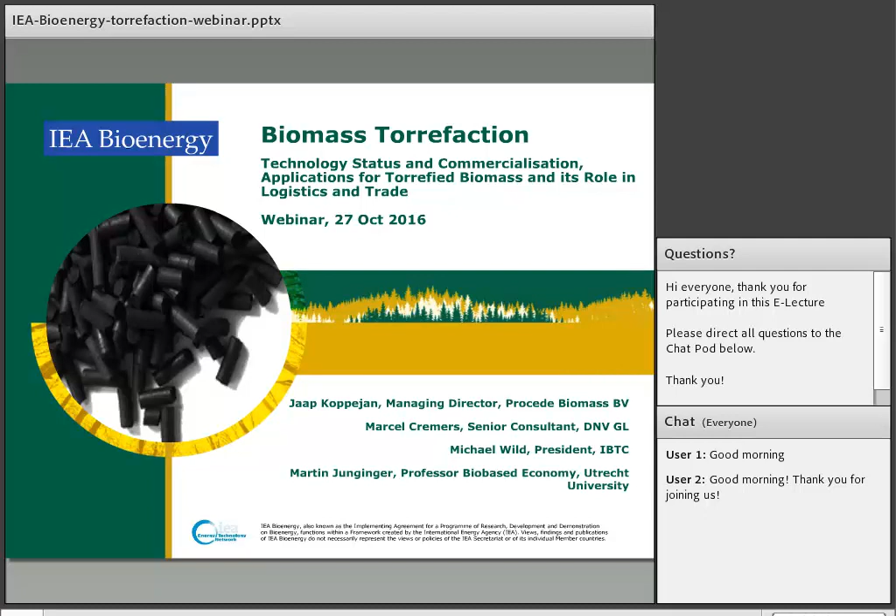For today, we would like to share some of the work that has been done on biomass torrefaction recently, done by people active in two projects that we initiated. One is a report published by Task 32 on the status of torrefaction technologies at the moment. The other is a report recently produced by Task 40 on biomass trading, showing the possible implications on international biomass trade. Both reports are available on the IEA Bioenergy website, so I'd like to invite you to download those reports for a more detailed look.

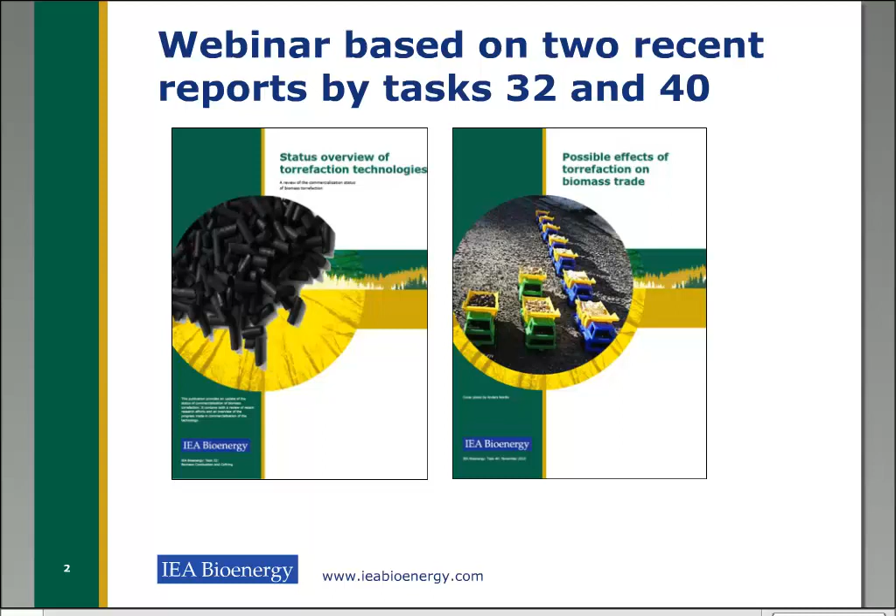For today there are four people involved in the presentations. First, it's myself, my name is Jaap Koppejan. I'm in my daily life also managing director of a contract research company involved in bioenergy, where we develop bioenergy technologies. I'm also a task leader of IEA Bioenergy.

The second person who will present today is Marcel Cremers. He is a senior consultant at DNV GL in the area of thermal power generation and has been involved in many technological reviews, feasibility studies, tendering procedures, etc. He has also been involved in Task 32 for a long time, and he is one of the lead authors of this report that we present today. He is also involved in many other activities in Task 32.

The third presenter today is Michael Wild of the International Biomass Torrefaction Council. He has been active in renewable energy for over 25 years, first in biomass-fired district heating systems in Austria, but also conversion of coal-fired boilers to biomass, for example. He has been involved in biomass trading for over 15 years, setting up supply chains from Asia and North America to Europe and to Japan, for example. He has also been involved in torrefaction technology for over 10 years, first with Andritz and now as president of the International Biomass Torrefaction Council. Michael is also active in Task 40.

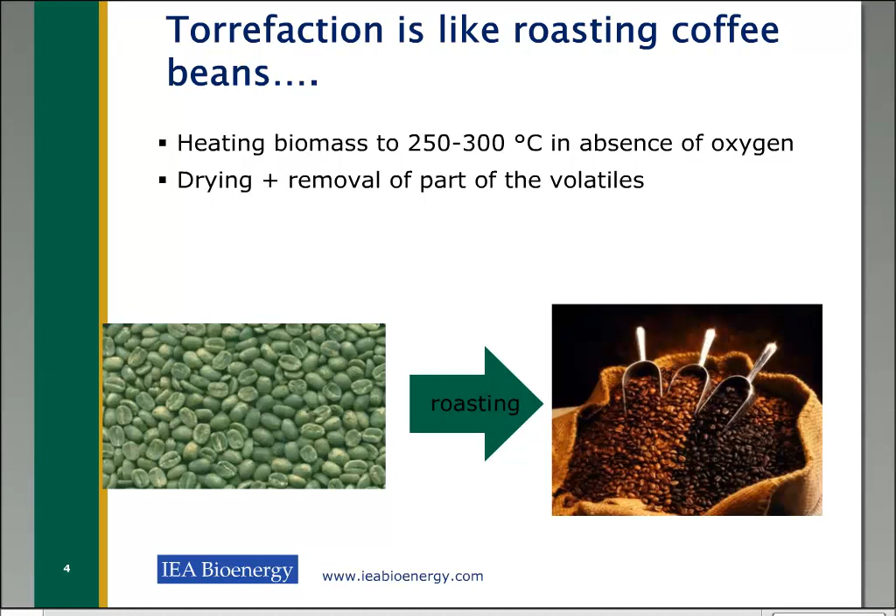As you see in the picture on the right-hand side, you can roast coffee beans to different degrees by changing the process conditions, and this is also what you can do with biomass. Depending on the temperature of torrefaction, you get darker or lighter biomass.

Moving on to the next slide. What are some claims made by companies involved in this torrefaction process who have tried to develop this process?

Claims made in the first place are that by doing this you can reduce the amount of volume contained in the biomass. So the volumetric energy density increases, and that could lead to cost reductions in logistics. Then by reducing logistical costs, it could be possible to transport biomass over longer distances, increasing the feedstock base geographically, or even use a wider variety of feedstock.

Then by roasting biomass, torrefying biomass, the biodegradation is reduced, so the biomass becomes more stable. You can use it in a larger variety of applications, not only biomass co-firing, but also some other processes, which Michael will talk about later.

Then in the back end, if you talk about a coal-fired power station, you have a fuel that is more compatible with coal, so it might reduce capex and opex costs in terms of grindability, for example, and water resistance. Then the combustion and gasification behavior becomes more compatible with coal.

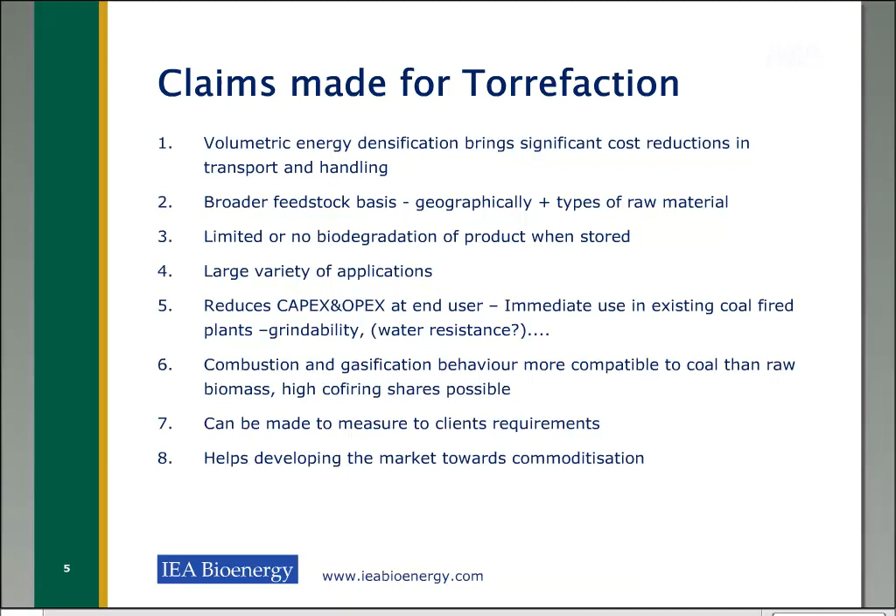So basically, if you sum up all these issues, we are producing a fuel by torrefying biomass that is more compatible with coal, so easier to feed into existing infrastructure. And by doing that, we can help the market towards more commoditization, making a standard fuel, and increasing the volumes of biomass that are traded internationally.

So how does this work? Looking at the energy balance, if you look at the amount of biomass that is converted into torrefied biomass, we see here just an example of a mass and energy balance, where black shows the heating value, red is the amount of energy, and blue is the amount of mass.

In the end, you see that by drying biomass, you lose some of the moisture and some of the volatiles, so the amount of mass reduces significantly. Then further torrefying it, the amount of mass is about one third of what we started with, while the amount of energy in the final product is almost the same, just slightly less than what we started with. So the heating value increases, and the amount of mass reduces significantly.

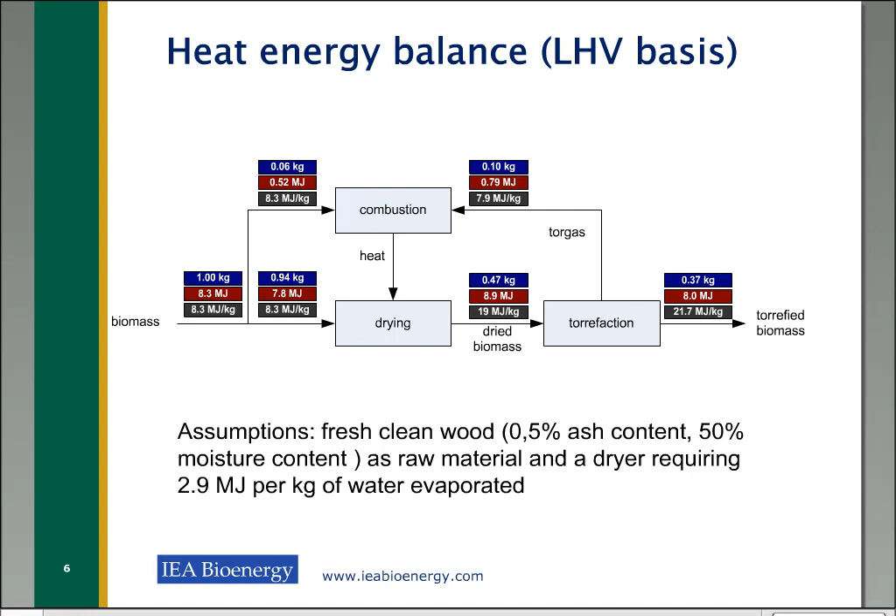So after torrefying, if you have a densification process, the volume of the biomass also reduces significantly, and we can have these volumetric... there's a graph in the first report that I mentioned that shows a little bit of the basic principles.

If you start with a dryer with an efficiency of 90%, or 80% I think we assumed here, you see some typical conditions where torrefaction could operate, say in this case 45% moisture content. The different lines here show different levels of dry mass loss. So if you reduce 30% of the dry mass during torrefaction and start with 45% moisture, then you could have an energy efficiency of over 90%.

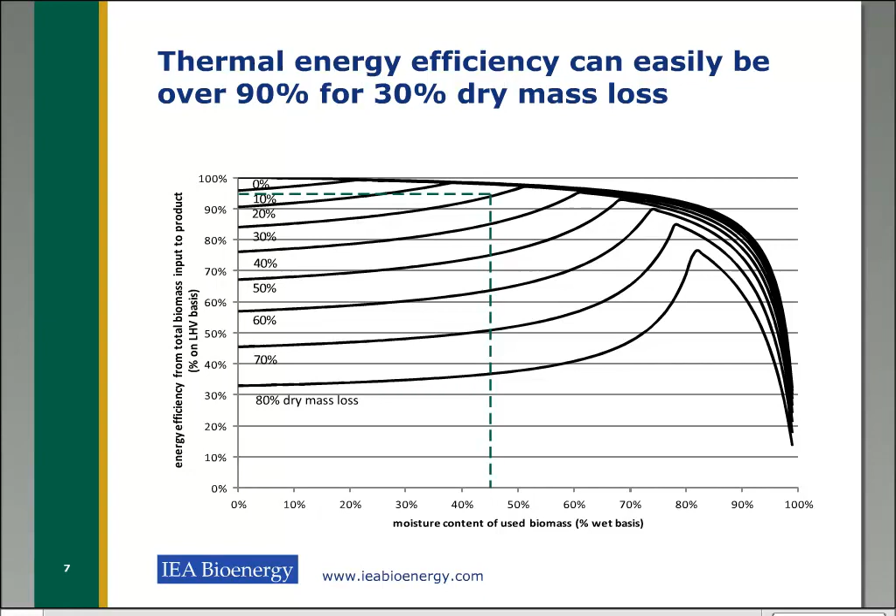This is typically what most processes operate at the moment. So this proves, or more or less illustrates, that torrefaction can be energy efficient.

Some technical challenges remaining where various developers have struggled include the water resistance of the product and pelletization of torrefied biomass, which is sometimes difficult to achieve. I think we have made quite some progress recently in this area, but still this was one of the points of attention.

Several process owners were unable to meet constant quality requirements and struggled with their process control, for example. Another issue was that dust formation of torrefied wood pellets could be significant and also create a health and safety issue. Then finally, the ash content, of course, increases if you torrefy biomass, because the amount of mass reduces significantly, but the ash still remains in the product.

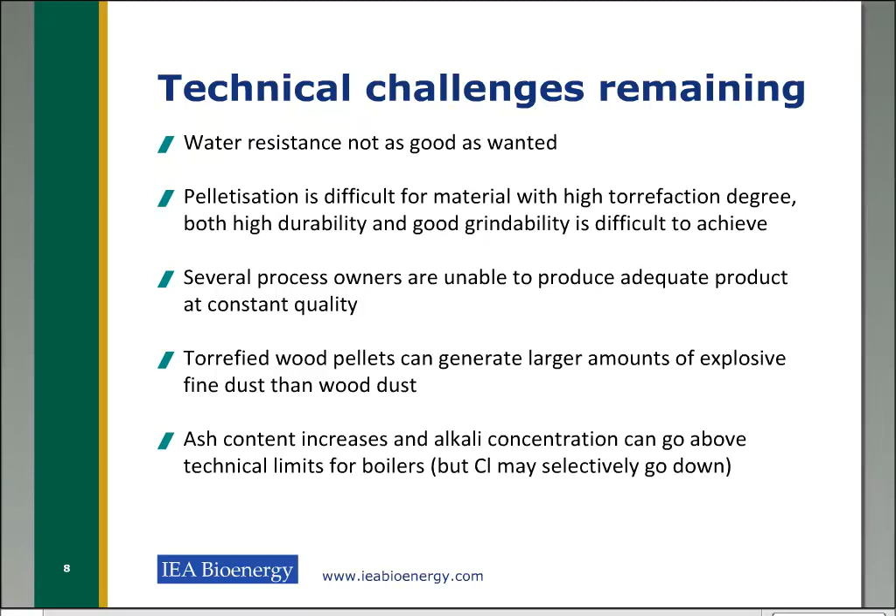On the other hand, we see that the chloride could, in some cases, be removed during torrefaction, which is quite an advantage for combustion processes.

And the reason for this is the fact that we have more volatiles in the torrefied wood. So basically, there are some issues also during conversion of the fuel, but looking at the impacts, our conclusion is that these are all manageable.

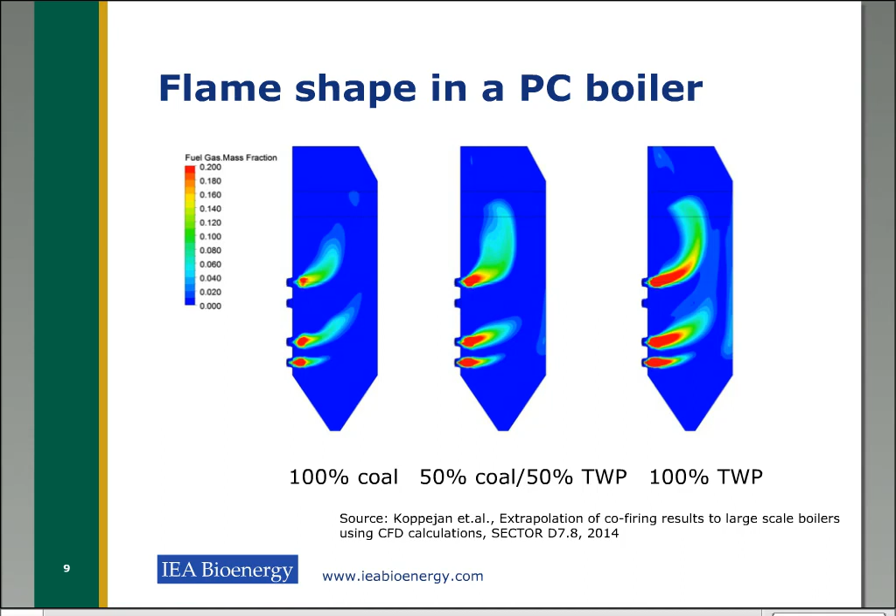Thank you all for listening. This is the section I will be presenting, about commercialization of the torrefaction technology.

It is mostly based on the work we did in 2014 and early 2015 on the status of biomass torrefaction within Task 32, which can also be found in the report.

The first thing we looked at is we wanted to have an overview of the current status of the torrefaction technology as such. We did an inventory among many different torrefaction developers about the current status, the capacity, and so on.

We performed an extensive round of interviews with many developers in the market. From the consultations, we derived that over the years, the total installed capacity has increased to somewhere around 150 kilotons per year.

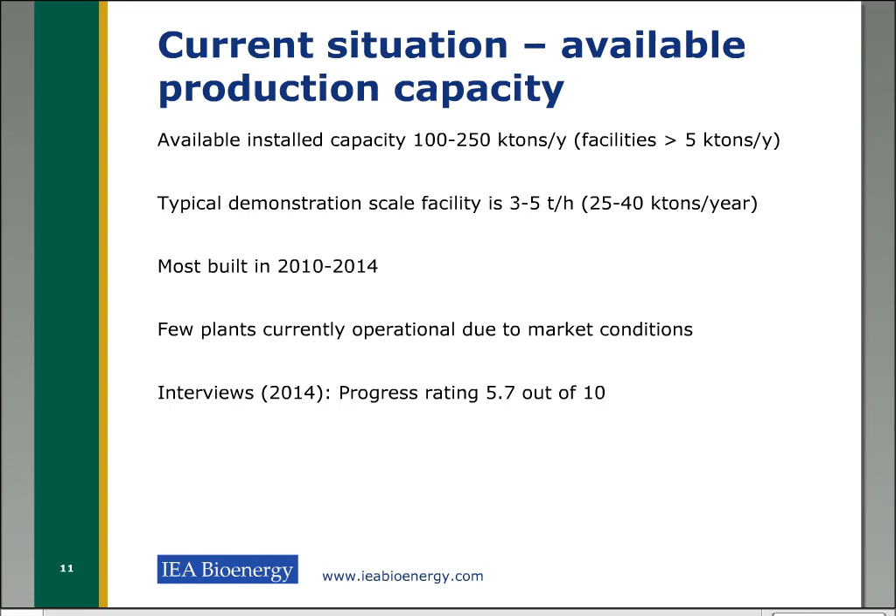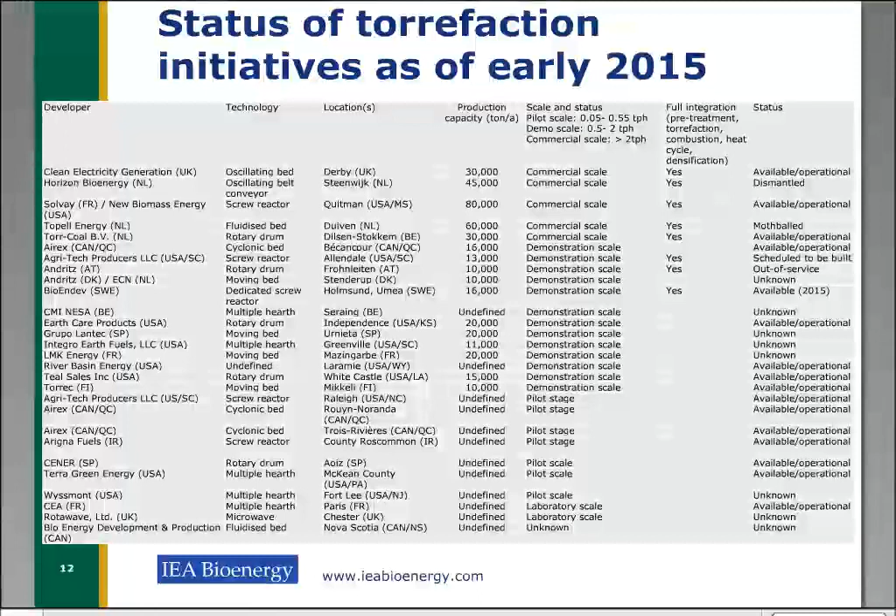For completeness, this is an overview of different torrefaction initiatives that were present in 2015. It is not completely accurate anymore, but essentially I think the overview is still valid.

What can be learned from this is that if you look at the scales, there is a variety available, from lab scale and pilot scale to demonstration scale. The largest facilities are somewhere between 30 and 80,000 tons. Locations are mainly in Europe, the United States, and Canada.

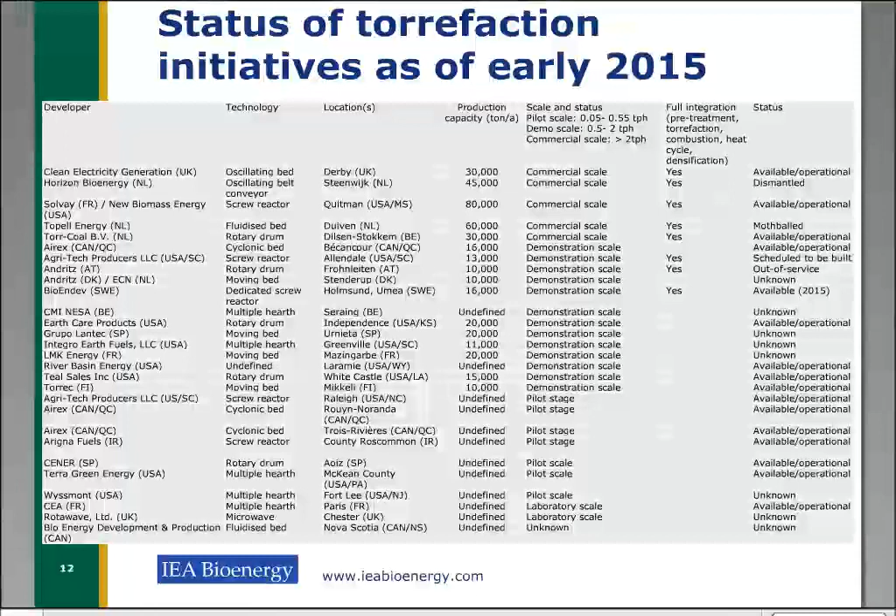And if you look at the status, from these demonstration scale facilities, many are currently idle, and some of those could be made available when needed.

We also looked at research, just a global overview of the tendency in the topic of torrefaction. We looked in the Scopus database and provided the keyword torrefaction, included in the title or in the abstract.

Just last year already, about 175 publications have been traced in Scopus on torrefaction, and about 90% of these publications are actually scientific articles.

So it means that a lot of information and a lot of knowledge is currently available on torrefaction, both on the process as well as on the product. And this gives a lot of room for further development of the technology.

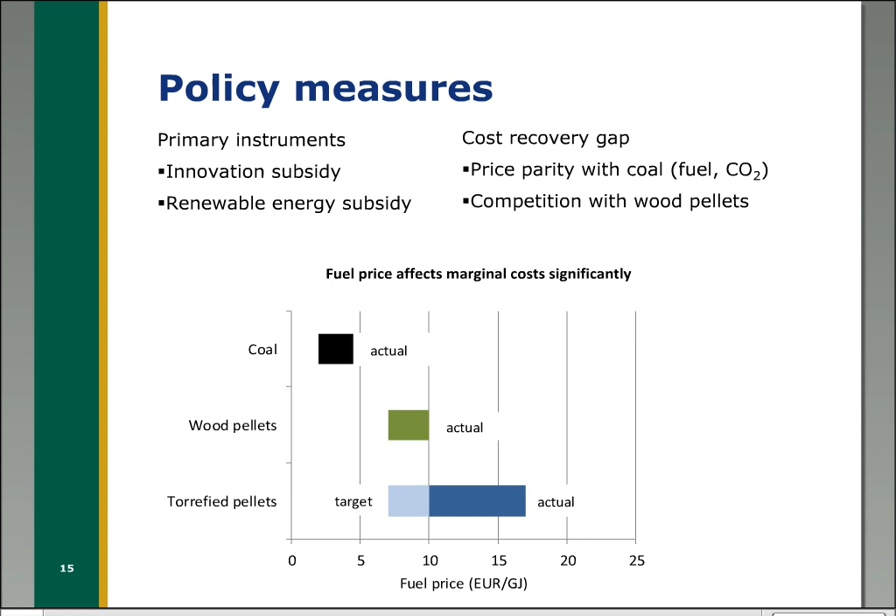Now, a second restriction is on the trade, and Michael will go more deeply into it. That is the development of standards is important.

The first thing that needs to be considered is what kind of product are we trading. So for that, a quality standard is needed. A technical specification of thermally treated wood is currently under development, but the final intent is to have a full technical standard. Then there are specific requirements for production and handling of the torrefied pellet.

That can be in the form of an MSDS, which has been developed under the SECTOR project. And then there are certain regulations in parts of the world that are needed, for example, for importing torrefied pellets. Michael will also tell a little bit about that.

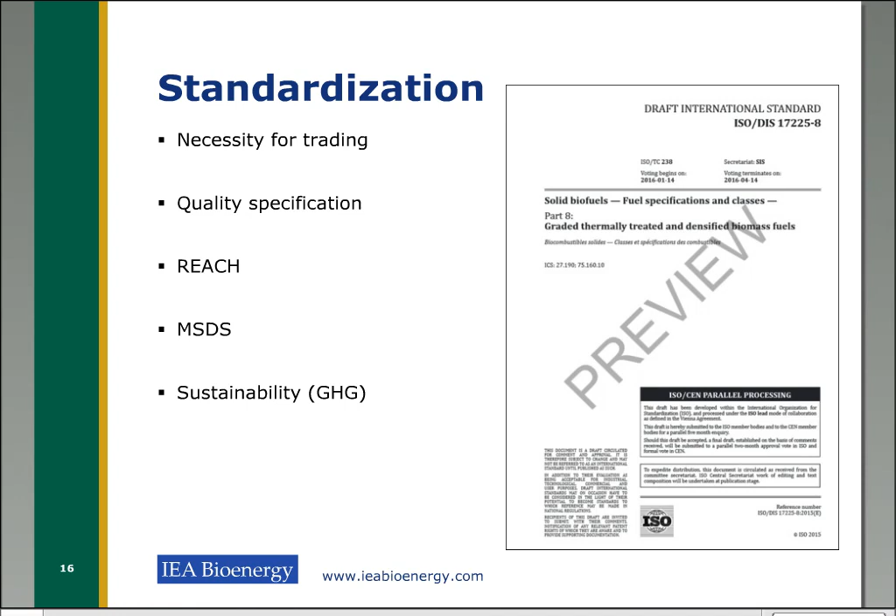And finally, we need to ensure that all the biomass we use is sustainable. So sustainability certification is definitely important as well.

Then the third restriction that was mentioned is that there is a negative perception by the end user of the product. So in the early 2000s, there was a very good introduction of the technology and the product, mainly done by ECN and some others, with very promising results about the product quality and how it can be used.

So that gave a boost to the technology, and in the period of 2008-2012 there were a lot of new initiatives. We saw various demonstration scale facilities with quite significant claims, but at the same time we also faced a financial crisis for which it became more difficult to obtain finance for new projects, and focus has been on torrefaction, and as Jaap also said, process control was sometimes a little bit difficult.

So this made the perception by the end users on availability and on the product itself lack a bit, and that was mainly in the years 2012-2015. It was difficult to gain offtake contracts for the torrefied biomass, and the wood pellet market further developed.

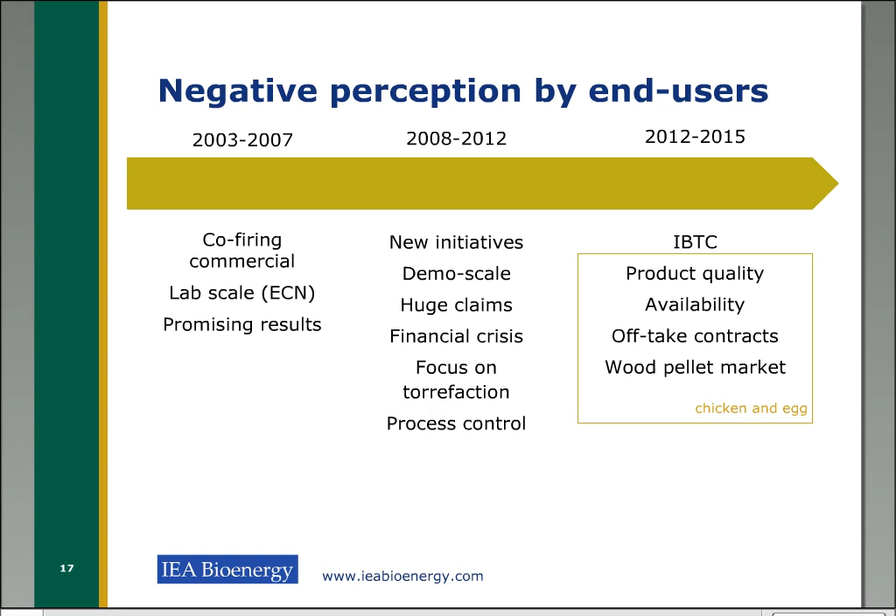So the main chicken and egg problem we faced actually is that there was not enough product available at a quality that was more or less claimed, and at the same time there was also not enough request from the market, so to say, in order to scale this up.

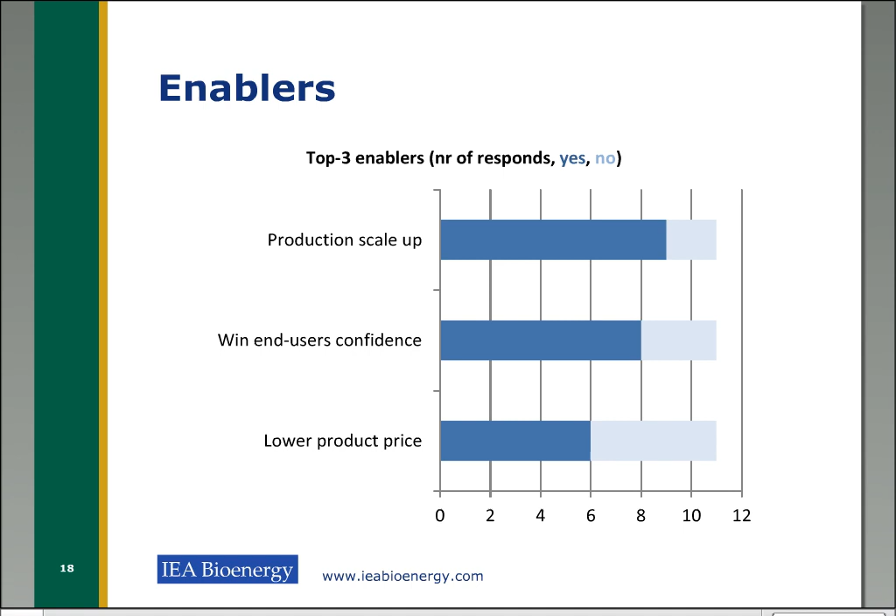So then we also asked what are the main enablers in order to further scale up production. That will help then to win the end user's confidence and also result in a lower product price.

A little bit, if you do some simple calculations like we did here, you can look at the demand and the production side. If you look at the demand side, for a 600 megawatt coal plant with 10% co-firing and about 6,000 full load operating hours, you would require about 150,000 tons per year of torrefied pellets.

If you look at what is currently available, most demonstration scale facilities have, at full-time utilization, a capacity of 25 to 40,000 tons per year, and most of them are currently only partly utilized. So the global production capacity is about the same size as needed for one plant with 10% co-firing. The production needs to be scaled up. If you look at wood pellets, typical facilities are somewhere between 50,000 and 200,000 tons. So scale is really needed.

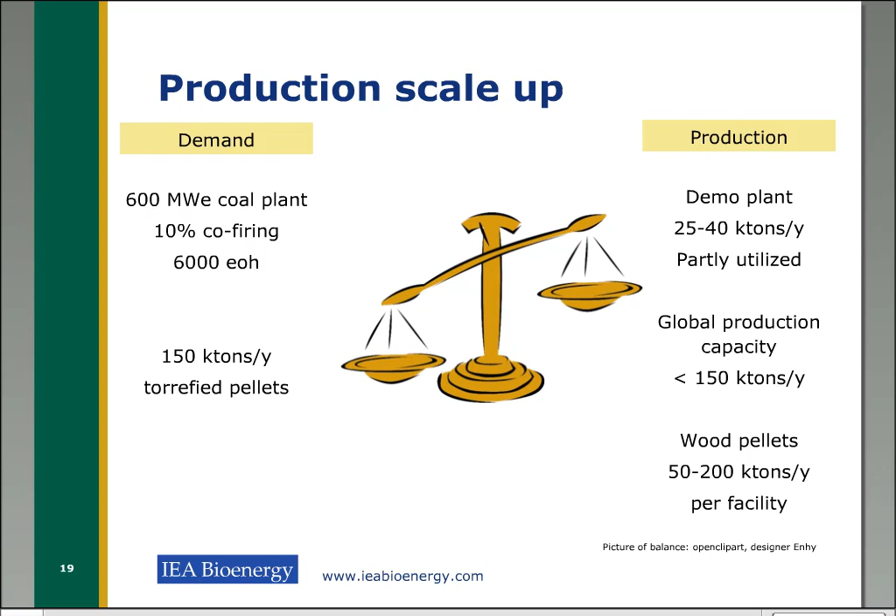Ways to win the end user's confidence include, for example, finding new markets. Michael will go deeper into this, and developing the whole chain in advance, which is important for technologies that are still in the development phase. Make realistic promises. Ensure the quality of the product. Ensure that the product is also safe to use.

Make a tradable product and have the proper standards in place. And then the last question is, in case you have a product with price specifications that's ready to use, how do you bring the price down?

If you look at our report from 2012, it shows the commercial target price for torrefied pellets compared to wood pellets. We also asked some utilities: if torrefied pellets were available on a large scale, the product quality was as expected, and the fuel price in the harbor was similar to that of wood pellets, would you consider using it? The general answer was yes, we would definitely consider it.

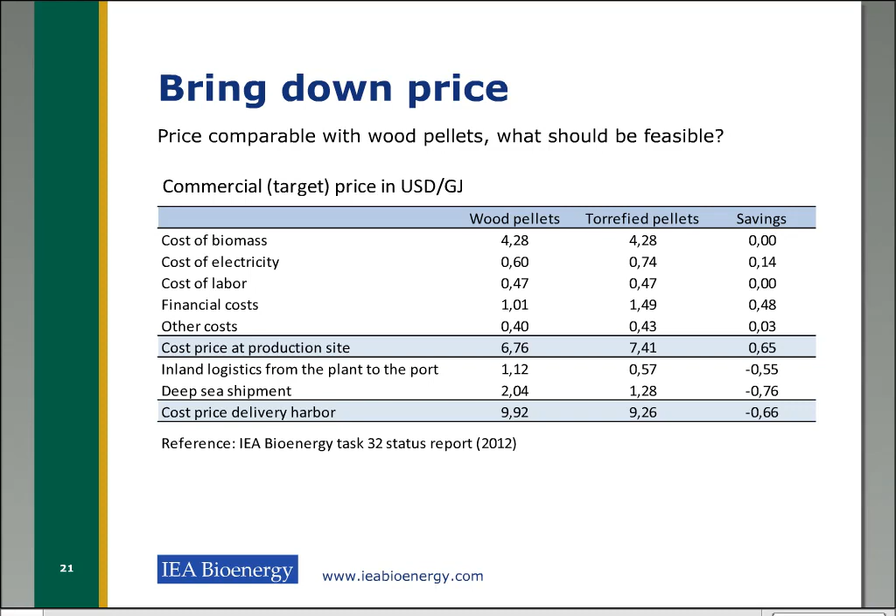So then the question is whether it's also possible to have a cost price in the harbor that is comparable to that of wood pellets. From the calculations, in which a torrefaction developer was also involved in 2012, it shows that torrefied pellets in the harbor could be in the same range as wood pellets.

To conclude, we have a process that is well developed, with a lot of research and developers who have gained a lot of experience. We know what the product looks like, but now we have to find specific markets, for example in energy or the steel industry, or maybe further ahead as part of a bioeconomy, where you use torrefied biomass, mill it, gasify it, and use the syngas for further utilization in the bioeconomy. That could be the potential of some markets.

At the current stage you would need to develop the whole chain, and in order to bring the price down, alternative feedstock types would be a way to go. One interesting example in this context is a project currently being developed by a number of companies in Indonesia. There's a reference here to a YouTube movie, so please have a look.

Finally, with that, I would like to hand over to Michael, who will tell you more about the tradability of the product, going into the details of the supply chain, the overall requirements for logistics and trading, as well as new market applications. So, Michael, the floor is yours. Thank you, Marcel, and thank you for this good presentation about the status of technologies and how some of the actors in R&D in the sector see the situation here.

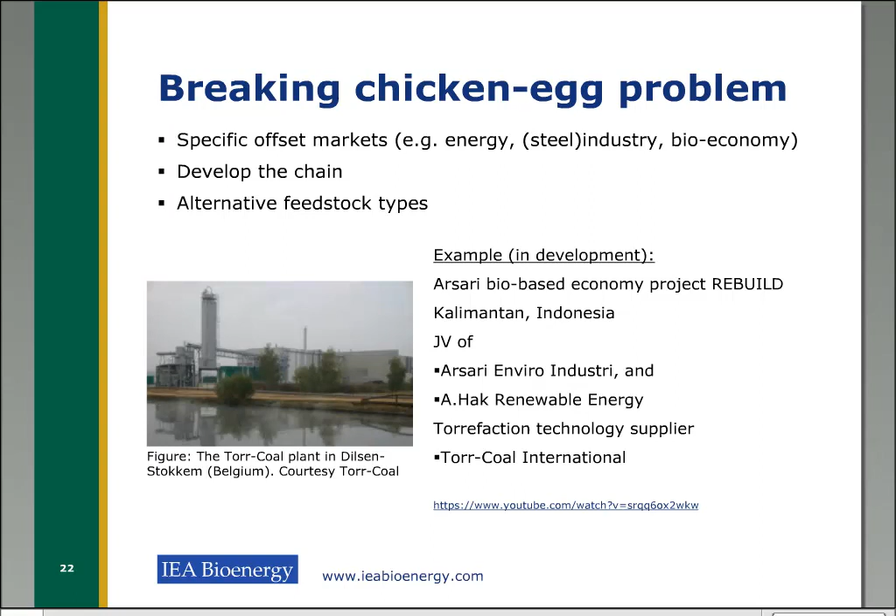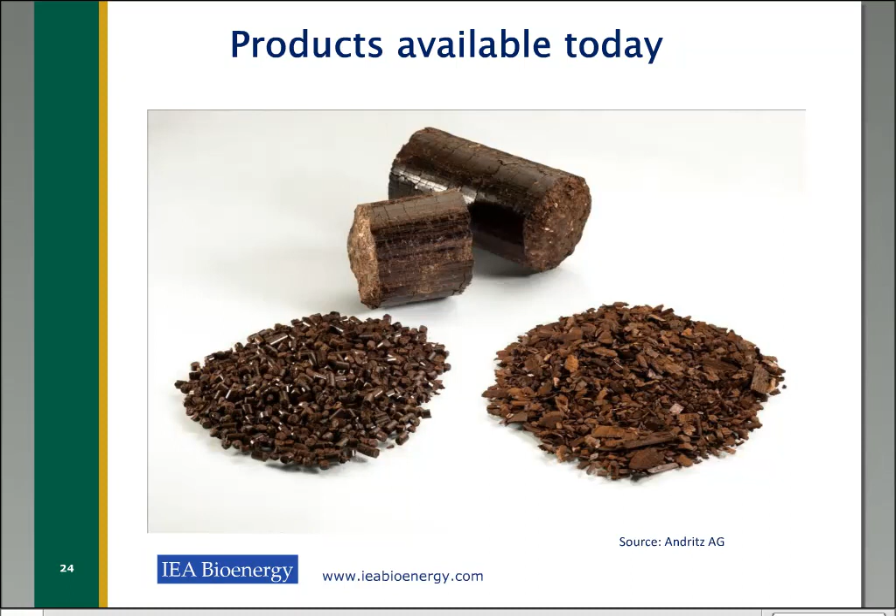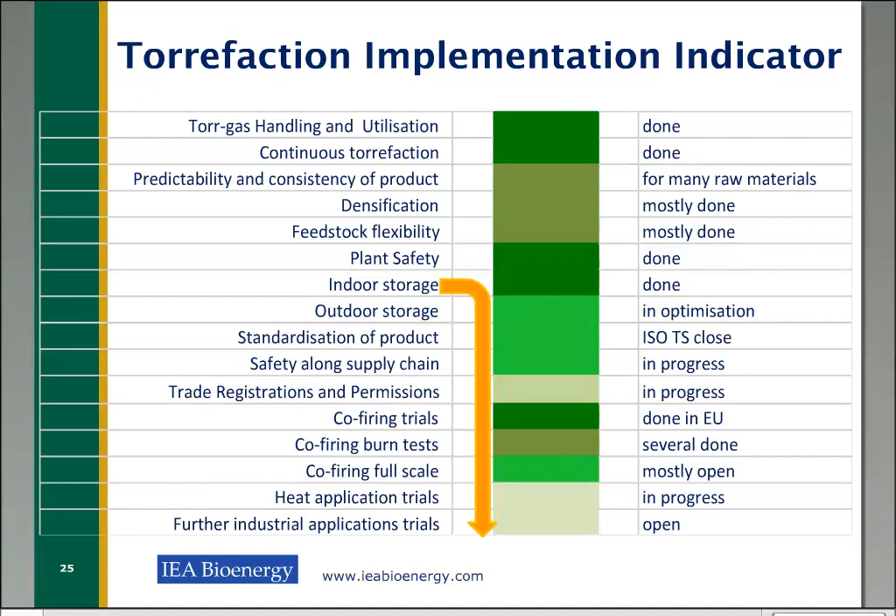When asking for trade, we have to first see what would be the conditions for trade, what is needed for trading. First of all, we saw already in Marcel's presentation that there is the prediction that the logistical costs for torrefied biomass will be significantly less. We usually say between 20 and 40%.

Now, how can we prove this? This will be part of my presentation, to show that torrefied biomass can be used or transported along existing logistical infrastructure. No special requirements will be needed. That was in our report one of the findings from different analyses we undertook.

We also have been looking at the status of standardization. Marcel referred to this briefly. I will introduce you to what the situation is and what we are expecting. And a precondition for trade is not only production and possibility of using logistical means, but there also needs to be demand, because this is usually the driver for the whole overall value chain.

So it is well known and discussed from the very beginning of torrefaction initiatives that torrefied biomass is a good substitute for coal in coal power plants, or for co-firing with coal. But is there more? Are there other markets, other sectors in the industry which might be interested in using this fuel? This was also part of what we analyzed in our Task 40 report, and I'll introduce you to the results here.

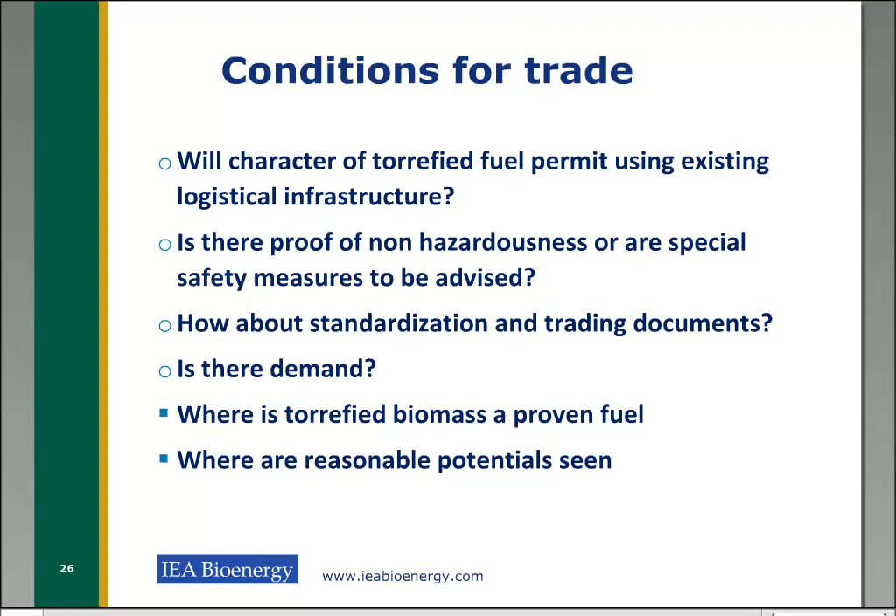I start with one of the preconditions for a very efficient transport: the water resistance. We know that wood pellets, once getting only close to water, start to disintegrate, meaning that to build a supply chain for this biomass to the consumers, there needs to be a new infrastructure, or an infrastructure which prevents 100% that water comes in touch with the wood pellets. This adds cost to the final product, and the torrefied product always claimed, because of hydrophobicity, that the densified materials will stay intact when in touch with water.

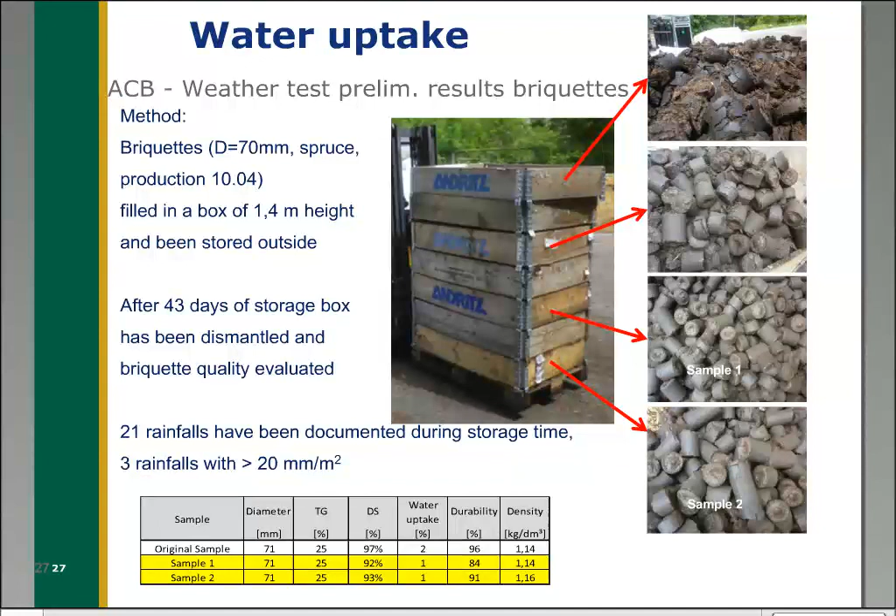A lot of water uptake tests have been undertaken. Unfortunately, there is no standard for water uptake, no definition of what it really means, what water uptake is. So most of the producers in the IBTC have developed their own water test, some research institutions as well. I present here the results gained by ANDRITZ, but similar results have also been shown by ECN.

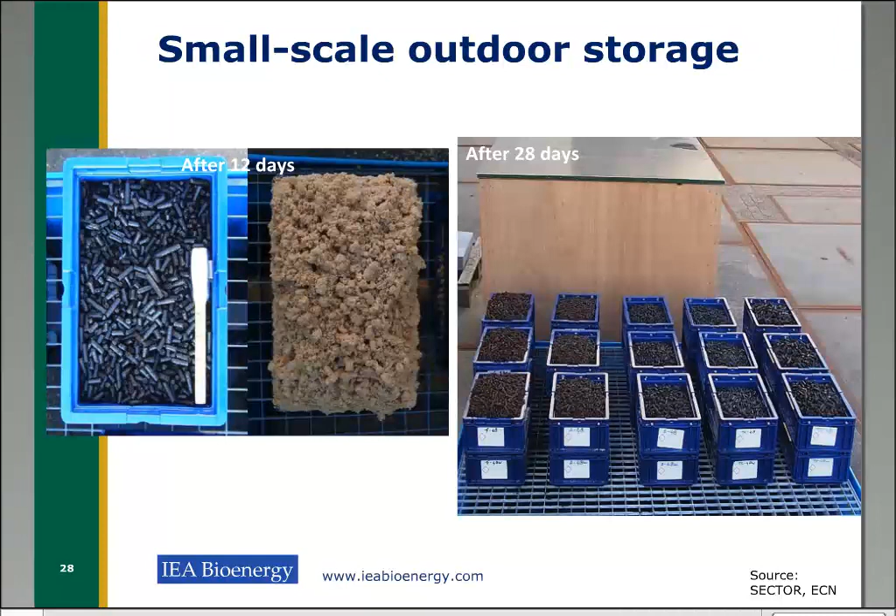Basically, the result was: short-term contact with water has absolutely no effect on the torrefied biomass once densified. Long-term contact will, on the heap, cause the top layers to get weaker, meaning they lose their durability. They will never disintegrate as much as the wood pellets in this picture are doing, but they will become a little bit weaker, so the durability will be reduced. But this is only for the top layer in the heap. If you go to the core of a heap, still the old characteristics will be found.

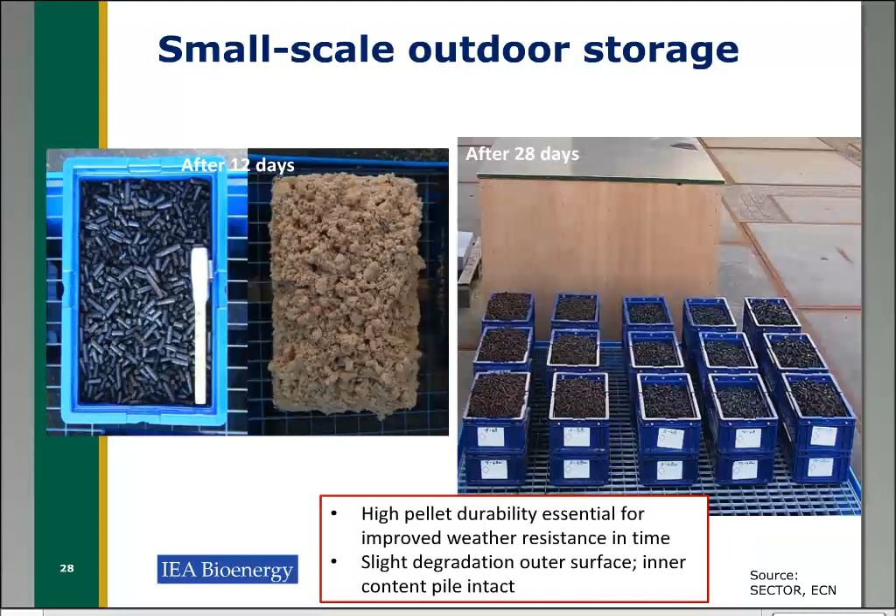Meaning that if on a typical coal yard, torrefied biomass is stored for 1 to 2 or 3 weeks outside, this will have literally almost no effect on the further handling of the torrefied biomass in the feed-in system in the coal power plant or in the industry. If you would like to store torrefied biomass for 2 years outside in rain and frosty conditions, then you have to accept that the durability of the product will suffer, and the product will be sufficiently, substantially weaker. Another reason for fear while transporting biomass is biological degradation.

Biological degradation has two effects. First of all, you have a mass loss, so you start shipping or storing a certain quantity, and in the end of your process you have simply lost some mass, some weight, and some value through the biological degradation. On the other hand, biological degradation also means that a lot of carbon monoxide, a poisonous gas, is produced, which, for instance, in the logistical chains of wood chips or wood pellets has already caused quite some bad accidents.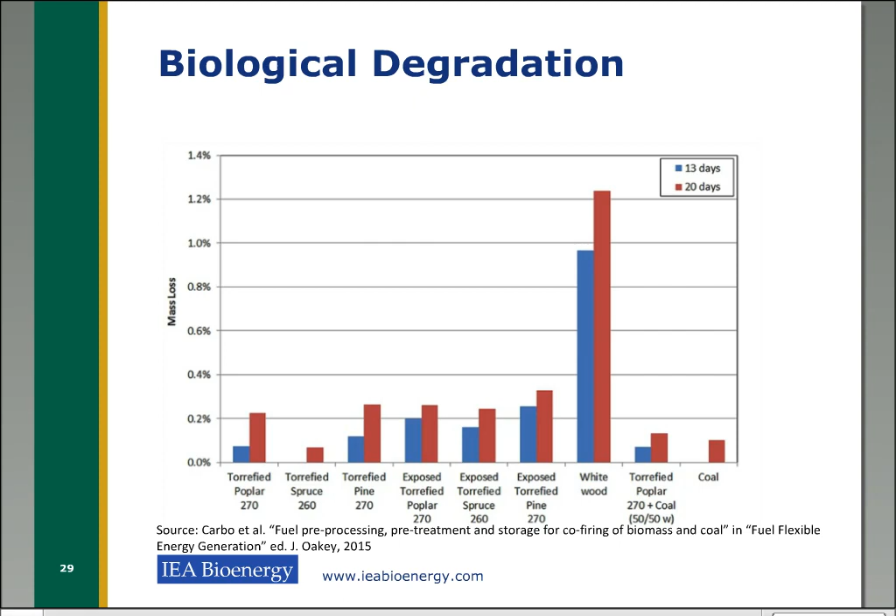Here with this diagram, we found proof that torrefied biomass has a much lower biological activity and biological degradation than fresh biomass, be it wood chips or white wood pellets. We see a factor of 2, eventually 3, lower biological degradation than with white wood, and this difference stays almost constant over time. So unless a very strong heat source is applied to torrefied pellets, you can estimate there is almost no ignorable biological degradation and carbon monoxide resulting from this in storage.

Furthermore, transportation and storage handling always require that you know precisely whether your product is highly explosive, and what dangers you are exposed to. Minimum ignition energy is one of the means to prove how easily a material explodes. Now we all know that pulverized raw biomass, pulverized wood, is very highly explosive.

Torrefied biomass does not change this situation, and pulverized torrefied biomass has almost the same or a little bit lower ignition energy values than raw biomass. With this diagram, we found proof that the explosivity of the dust is not really a result of being torrefied or not, but rather a result of what the raw material has been, where the pellets or torrefied pellets have been made from.

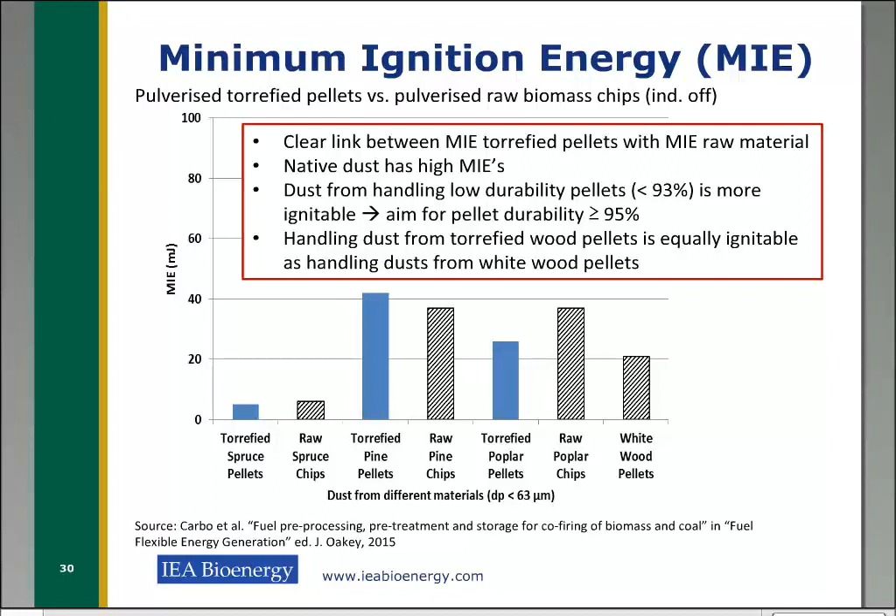Nevertheless, torrefied biomass is much more brittle than non-torrefied biomass, meaning the appearance of very fine dust is more likely in torrefied value chains. This sets the requirement for higher and more constant durability in traded products, giving eventually a slight advantage to briquettes in international trade, simply because the surface-to-volume ratio is better with briquettes, and fine dust will always only appear on the surface.

Storing torrefied biomass outside means it is exposed to water, so there is some runoff water. Is this runoff water toxic? Is it ecotoxic? From research results in Austria undertaken with Andritz and Austrian research institutes, we found that once tested according to the DIN standard, the runoff and leaching waters of heaps of torrefied biomass stored outside show no proven ecotoxicity we have to be afraid of.

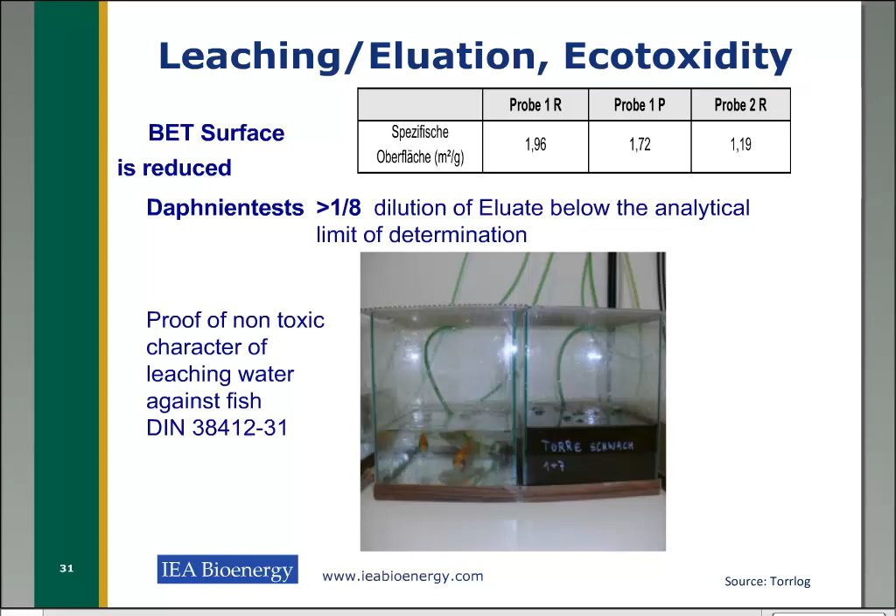By this, we see that to date there is nothing special requiring additional requirements for torrefied biomass compared to any other solid biomass traded.

Now, coming to standardization. It was very clear from the beginning that standardization is one of the key elements to make this successful, simply because at the beginning of the torrefaction market there were so many confusing expressions, from torrefied pellets to biocoal, black coal, biochar, black pellets, and so many different trade names developed.

So to make it clear for customers what product they are being offered, we initiated from the very beginning of the IPTC the introduction of a quality standard. And because the ISO 17225 solid biofuel standardization process had already started, we embarked on this.

Task 40 could report that the process was well underway, and now, even after the Task 40 report, we can report that the committee has decided on technical specifications as a first step in the standardization process, with a full standard expected in 3 to 4 years after some experience in logistics and with final customers is gained. These technical specifications are expected to be released in Q4 2016, maybe Q1 2017.

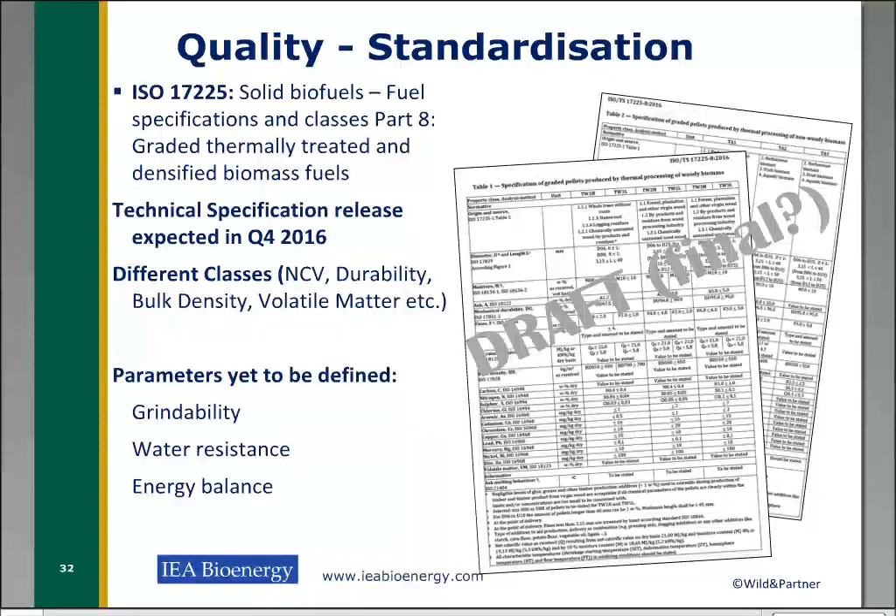In parallel, there will be a second group of defined products, which is quite important to me, because here the ISO committee took reference to the initiative of the torrefaction industry, not only to torrefy wood, but also agro byproducts or dedicated agricultural feedstock. This addresses one of the core issues of cost competitiveness of wood or biomass with coal. Wood is simply an expensive product, while several byproducts of the agro-industry and eventually grass plantations would produce much cheaper biomass, enabling a much cheaper product to be supplied to the industry.

We see that torrefaction is really a door opener in this direction because of the reduction of chlorine content, organically bound chlorine content in many plants, which can be proven by many technologies. It reduces problems down to alkali and potassium, but we foresee this also being handled very soon. So torrefaction here broadens the feedstock basis significantly.

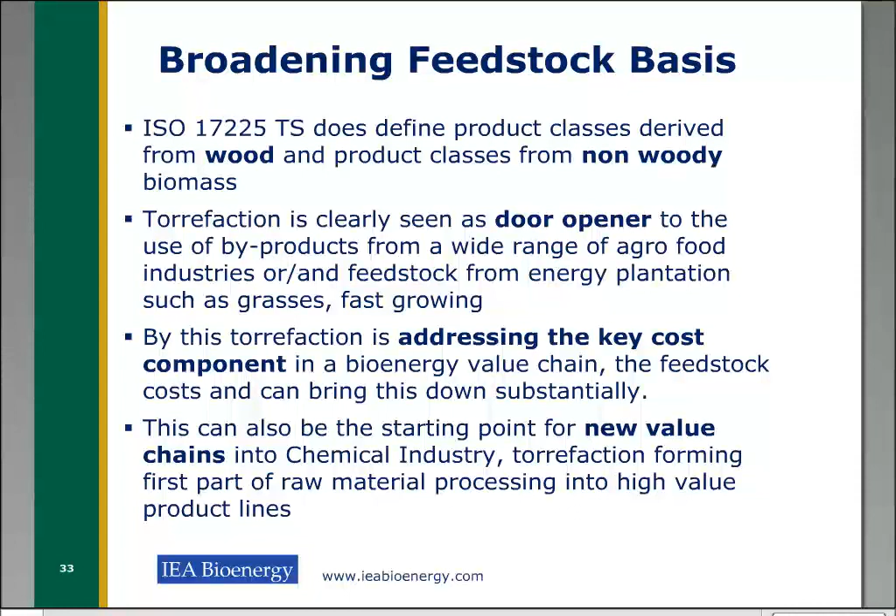By this, torrefaction can become the technology in areas where there isn't a lot of forest, but there is a lot of grass plantations or room for grass plantations and other biomasses to be planted. So torrefied biomass is not as sensitive to raw material quality as today's wood pellet industry.

In trading, you need a lot of documentation to convince your counterparts, be it a vessel owner or store owner, that your product is safe and secure to handle. For this, the material safety data sheet was developed together with Sector. This is a standard material safety data sheet which now has to be adopted by each and every producer and supplier of fuel. In certain regions of the globe, there are certain specific requirements.

In Europe, this is REACH, a registration database where chemicals brought to the market need to be registered. It was for long unclear if torrefied biomass is seen as a chemical or not. Wood pellets are not, coking coal is not, so we were unclear whether it was necessary to register or not.

The IPTC set up a Substance Information Exchange Forum, a so-called SIEF, under the REACH and ECHA regulation. This came to the conclusion that there is no registration needed. Whenever somebody is producing or trading torrefied biomass and wants to bring this product to the European market, please get in contact with this SIEF or with the IPTC to take part and make sure you are also covered by this non-need to register the product when bringing it to the market.

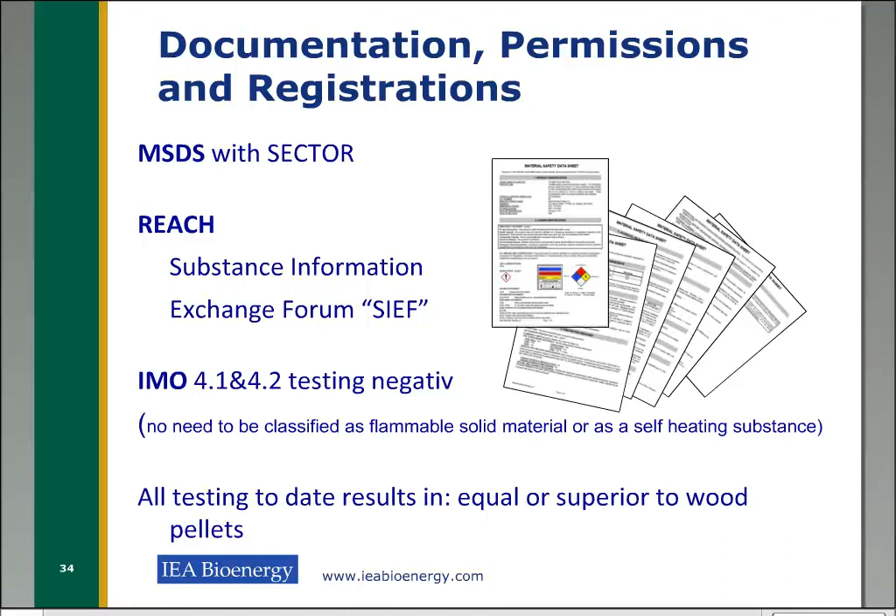For shipping itself, it is very important that you test negative on IMO 4.1 and 4.2, meaning flammability and self-heating substances. That proof was given by analysis from VTT and other research institutions. By this, we can prove today, and this is what the report also says, that torrefied biomass is to be categorized as a non-hazardous good, which is very good news, because it proves that all the cost advantages we expected over the supply chain can really be realized and accounted for.

For the final consumer, one of the drivers for consumption is how the greenhouse gas comparison looks against white wood pellets, for instance, or other biomasses, and certainly coal. These results by DBFZ do show impressively that torrefied biomass, almost independent of the raw material source, is much more greenhouse gas efficient than pellets produced from this material without torrefaction in the process.

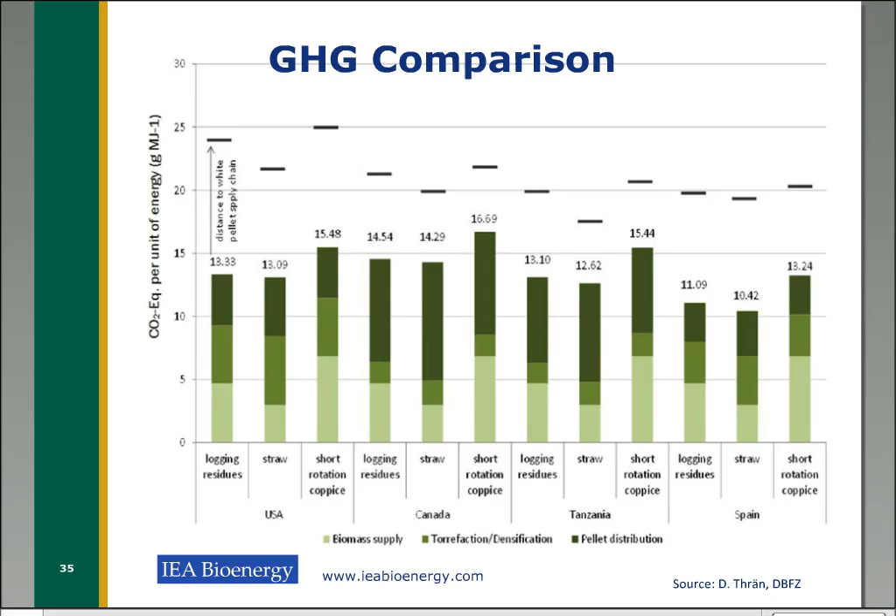Now, by this I'm already moving on to the demand side. There are a lot of industries waiting for a biomass commodity which can be applied in existing infrastructure. First of all are the coal power plants and the power industry. Here, quite a number of full-scale burn tests have been undertaken, mostly in Europe.

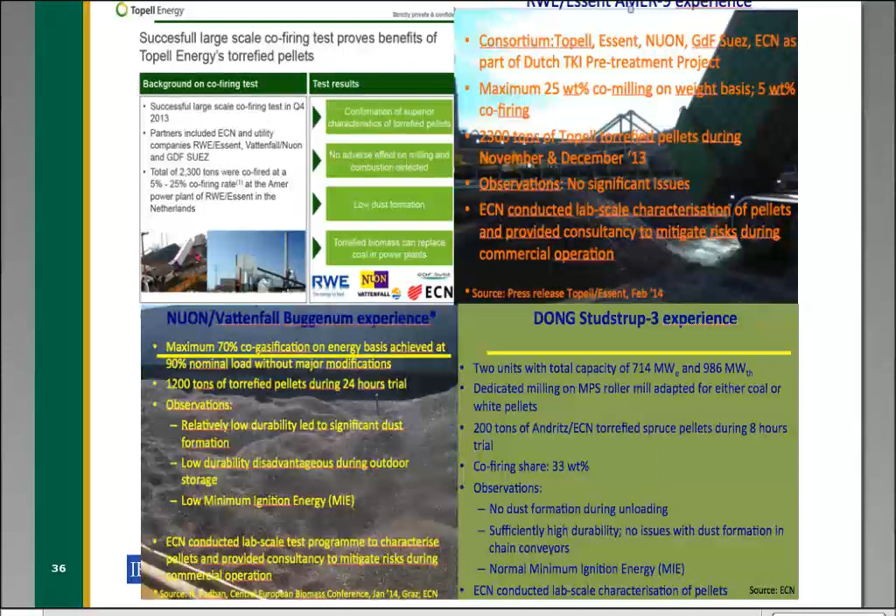But there are other industries also eyeing torrefied biomass, for instance the steel industry. For the steel industry, the replacement of coking coal and pulverized coal, which they sometimes use for the activation of limestone and other processes, torrefied biomass is extremely interesting. Steel industries are usually a significant contributor to CO2 emissions in the countries where they are established, so this is also a political measure, and they feel some political pressure to undertake certain steps.

The chemical and petrochemical industry sees big potential in torrefied biomass for its ability to produce a very homogeneous and clean gas if gasified.

Chemicals can be derived from biomass much easier, and all the problems experienced to date with gasification of solid biomasses are to a certain extent overcome with pre-processing in torrefaction. The pulp and paper industry, using lime sludge kilns as a general coal substitute, is one of the core interested industries, and even more interesting in terms of volumes is the non-metallic minerals industry for substitution of conventional fuels in kilns.

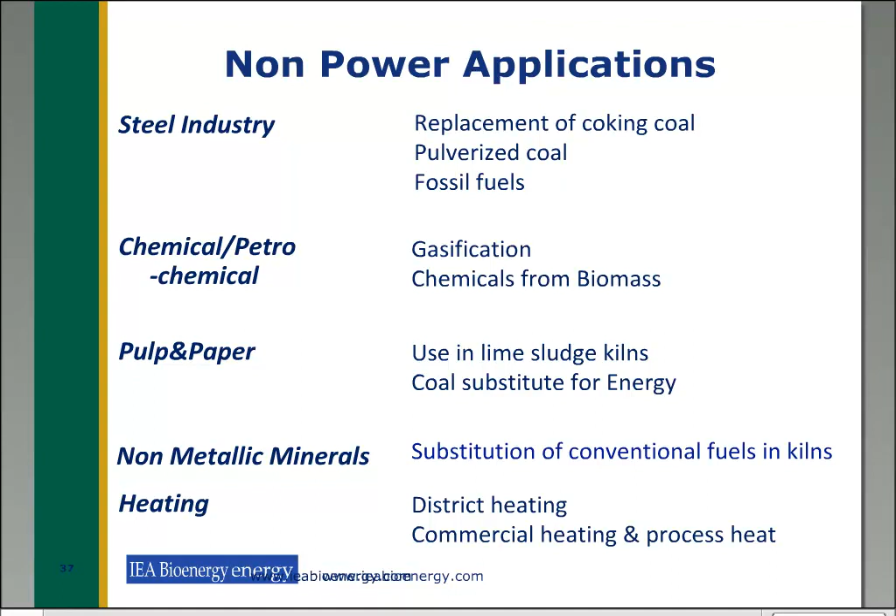Besides industrial applications, there are heat applications covered today with biomasses. Torrefied biomass here qualifies mostly for larger scale: district heating, commercial scale heating processes, and process energy. First experiences with district heating are very satisfying, and one key advantage is that due to the higher density of torrefied biomass, fewer trucks need to arrive at the district heating or processing plant—a key advantage especially for densely populated areas.

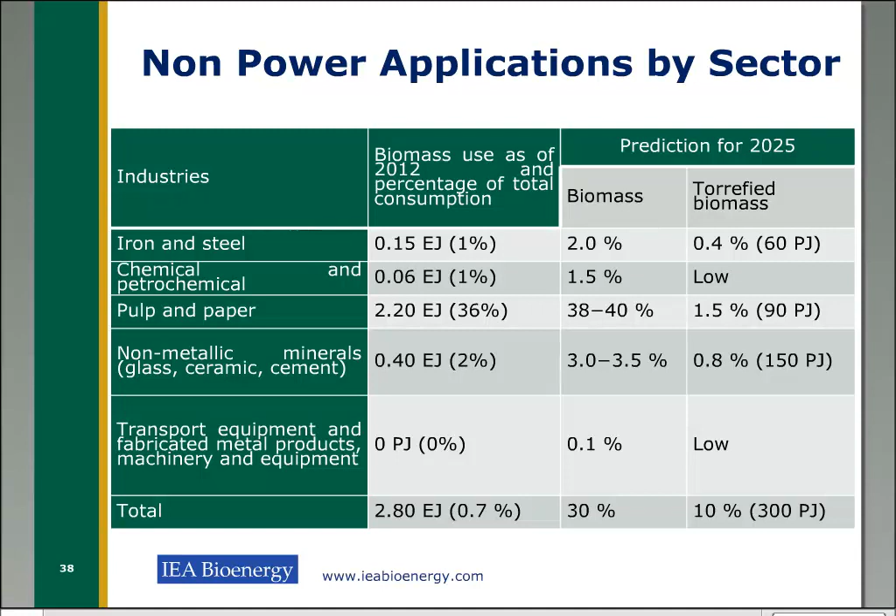Looking into the volumes we might see by 2025 by sector, we estimate non-metallic minerals as by far the biggest, followed by pulp and paper and iron and steel industries. Overall, the contribution of torrefied biomass to total biomass consumption could be 1/3 or 10% of total consumption, leading to approximately 300 petajoules of consumption.

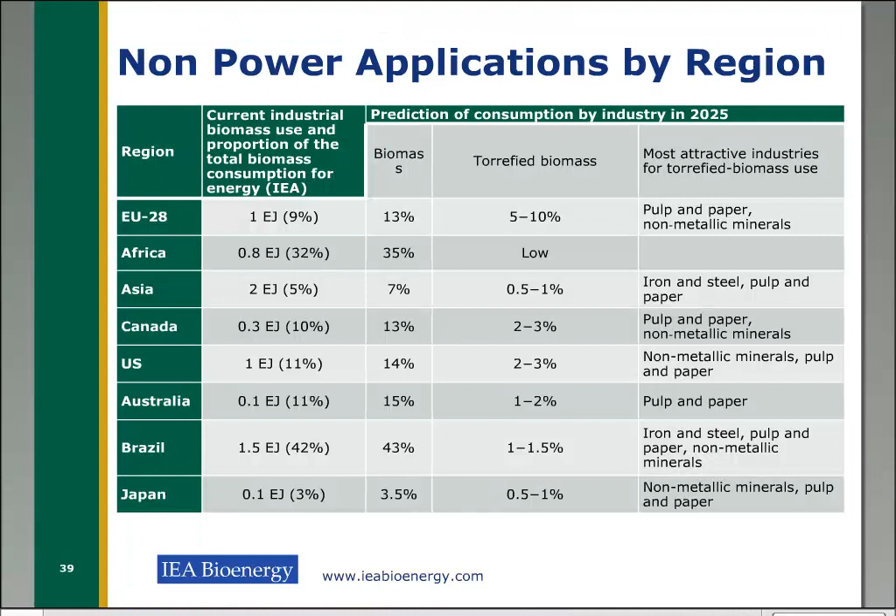300 petajoules converts to approximately 15 million tons a year of torrefied biomass consumption. By regional distribution, Europe is still going to be the leader in biomass consumption simply because so many measures and political structures are already established. But other areas are following—Asia is picking up, particularly Japan and South Korea, and also North America, Canada and the United States show growth potential. By 2025, there might be substantial volumes of torrefied biomass substituting first coal, and also some existing biomass supply chains.

Now, to conclude, where are we today? With torrefied biomass on the downstream side, starting with a clear definition of the product and its quality via the ISO technical specification, which will be issued very soon. It is verified that handling and storage advantages along the logistical chains exist and can be capitalized on, showing 20 to 40% cost savings and reductions.

There is already verified acceptability for co-firing in existing coal power plants. Other industrial applications like the steel industry and cement industry are well advanced in testing torrefied material and will soon join and start combusting torrefied biomass in higher volumes. The derivation of energy carriers from non-woody biomass is very successful to date and will be implemented on a larger scale soon, with projects we see in Africa, particularly South Africa.

By this, we see that we are different to some other technologies. There are several technologies in the torrefaction sector—much more than only one producer, there is a number of producers. By this, the risk for any large-scale off-taker is also split, and with many producers of more or less the same product, this is the precondition for further commoditization of solid biomasses. The torrefied product will contribute significantly, especially as the final price per gigajoule or megawatt hour at the customer will be competitive with all other biomasses consumed today.

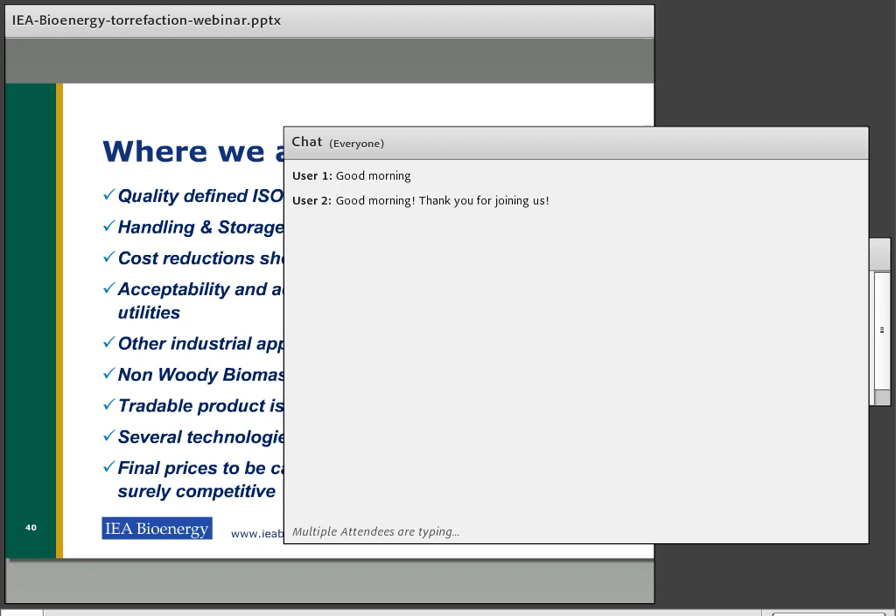So how do you see torrefaction of non-woody biomass evolving? I guess it's a question for both of you, Marcel and Michael. Who would like to go first? Marcel, would you like to start? Yeah, I can start with that one.

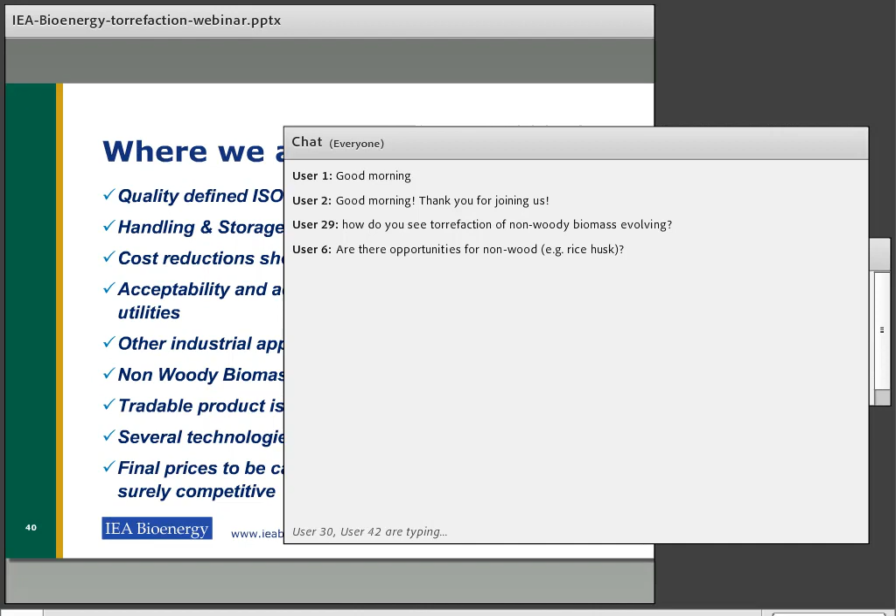I think that the technology in itself has been focused mainly on woody biomass for the pilot and demonstration scale facilities. But the aim of the technology is to have a fuel flexible technology, and there are also developments for using different feedstock. A lot of tests have been done with different feedstock types, so it would definitely be a technology that should be able to cope with different types of non-woody biomass.

Maybe to directly follow up with a second question from Ruben, sorry, also Michael, obviously non-woody biomass has far higher ash contents, which was already mentioned during the discussion, maybe increased even further. They may have high silica content, like rice husk, as mentioned by Ruben. Do you see specific technical and non-technical challenges when using non-woody biomass for torrefaction?

Basically in torrefaction, the ash content and the minerals content is not influenced. It's just, as said before, the chlorine content will be reduced. However, the amount of ash in reality in biomass is always much lower than in coal, for instance, maybe with the exception of rice husk. So basically, it's not the amount of ash which is the important or eventually limiting factor, but how the ash would behave. So in reality, what is the ash melting behavior, and how is the alkali and silica or potassium equilibrium.

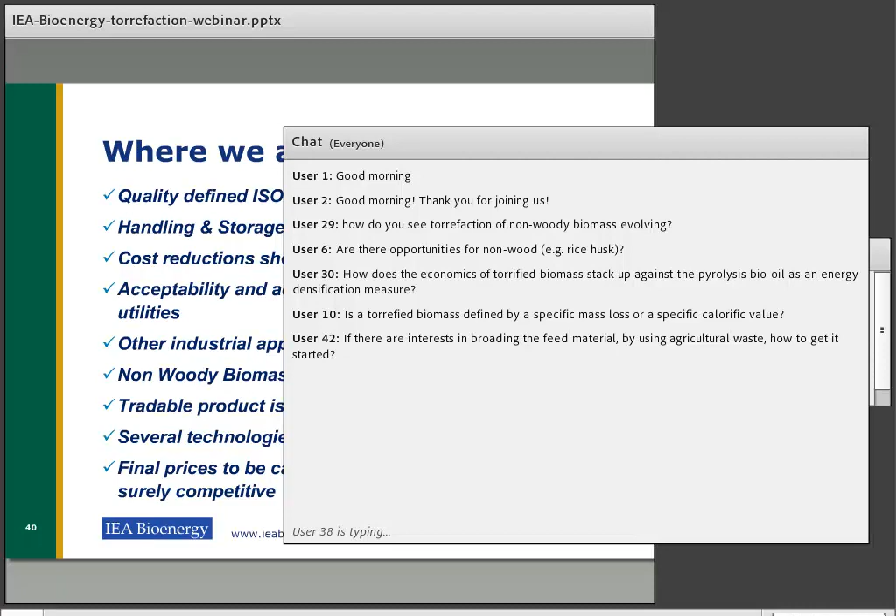This is something where now also the consumers are asked to join in and help the final development. There are measures to handle this, and there is a lot of experience with the coal power industry on how to handle misbehaving ash and misbehaving mineral contents.

We do see that this is really a measure or an activity which is worthwhile to spend more time on. Many torrefaction companies have focused on this now, simply because about 40 to 50% of the full cost is the raw materials or the feedstock which is produced, and this can be influenced. So if this cost factor is influenced, the effect on the final product cost, on the final energy cost, will be much more significant than on any other of the links of the value chain.

We see, for instance, that in the palm oil industry, with empty fruit bunches, palm fronds, prunings, there are some activities ongoing. We see, especially in Africa, that there are projects dealing with grasses and grass plantations, which also have the advantage that some land which cannot be used for other activities or agriculture anymore is used. So there is a movement in this direction, and now it's really time for the consumers to join in and help find the right recipe, literally, for the product which can then be accepted by them.

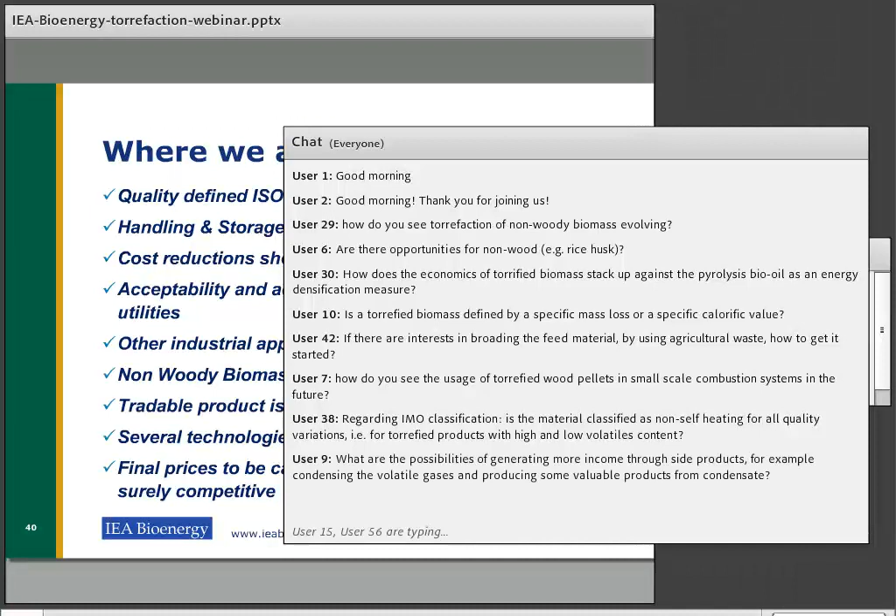Stephen would like to know how the economics of torrefied biomass stack up against pyrolysis bio-oil as an energy densification measure. With pyrolysis, we've also seen some recent developments, amongst others in the Netherlands, I think also in Finland. So these are in some way competing technologies. In other ways, they obviously also have different properties, different end markets. But this question is specifically about economics, so I guess the euros or dollars per gigajoule delivered to the end users. Marcel, Michael, how does torrefied biomass compare against pyrolysis oil?

Yeah, maybe I can give a start here. Generally for torrefied biomass, we aim to have a target price of below 10 euros per gigajoule. As far as I know, for pyrolysis oil it will be higher than that, but the product is also different, and the application should also be different. So the question is how well the comparison would be from an end user perspective.

Yeah, but I agree with what Marcel said, there's not much to be added. At the moment both technologies are in a very early stage, so it's difficult to compare the economics yet because there's simply not enough experience. I'd say the pyrolysis bio-oil process product is going in a different direction, covering other markets, and will later be influenced by different market forces than the solid biomass sector. So I wouldn't feel fit to give economic comparisons, and secondly I don't think these two things will be directly in competition.

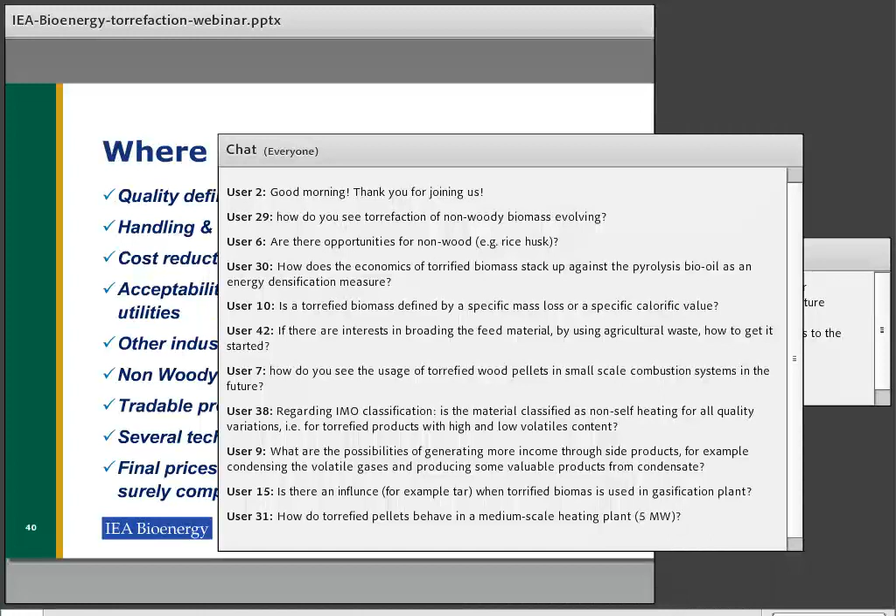Then from Shabab, he would like to know: is torrefied biomass defined by either a specific mass loss or a specific calorific value? Is there a general understanding in the industry of a specific calorific value that should be aimed for, or a minimum or maximum mass loss that's acceptable? Can you comment on this?

That was precisely one of the discussion points in the ISO committee, as far as I understood and learned from them. The conclusion was that to date we rather define different steps and different calorific values or mass losses in different categories. Basically, the industry agrees that a net calorific value of approximately 21 gigajoules per metric ton is the benchmark from where biomass can be named torrefied. This is almost reachable, or based, on woody biomass. If you go to agricultural biomass, which has significantly higher ash content, then already 19 or 19.5 gigajoules might be a significant improvement of the net calorific value of the raw material.

But please have a look once the technical specifications are published - you will see the different categories and classes which are suggested for the time being, where the market will start to pick up on, and we will see if there will be a revision in the next years because of the learning process.